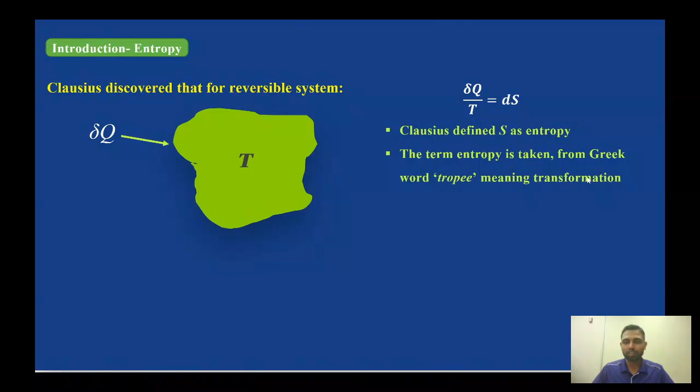So we used a concept called entropy and entropy generation. This is a very old concept. People think it's very difficult, but it's actually the simplest concept available. Clausius discovered that for a reversible system - meaning you start from the same state and end up in the same state - when you give heat to the system, the temperature increases. He defined the ratio of heat by temperature as the change in dS, and he defined S as entropy. In Greek, tropee means transformation. So this is the basic idea of entropy.

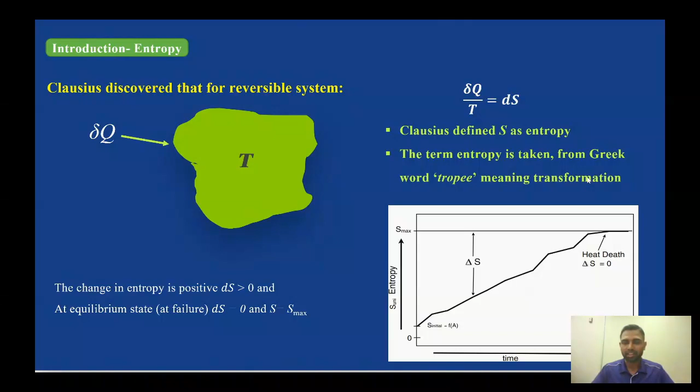Now coming to entropy generation - any degradation process, like any failure system going through failure, is irreversible. A reversible system doesn't have any damage, but an irreversible system will have damage. That damage increases your disorder, which is your entropy. So this entropy generated is called entropy generation, and entropy generation is a universal mechanism.

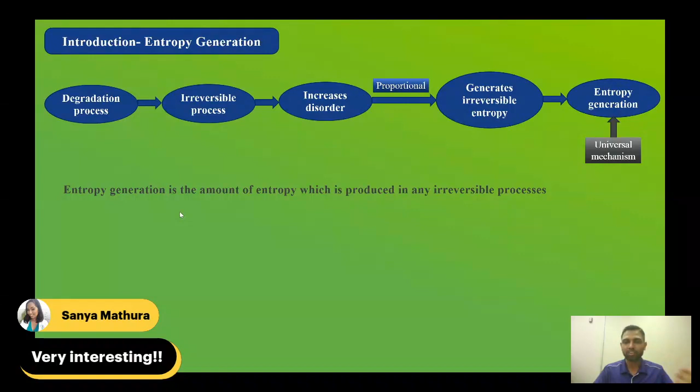So we will be using entropy generation as the topic for evaluating grease performance. Entropy generation is the amount of entropy produced in an irreversible process. During a reversible process, entropy generation is 0, but in an irreversible process there is damage - for example, wear, friction, everywhere we have entropy generation. So entropy generation can be the potential mechanism to measure the permanent degradation of any system.

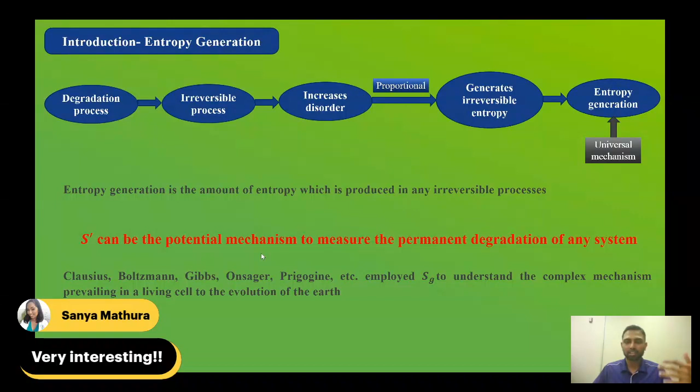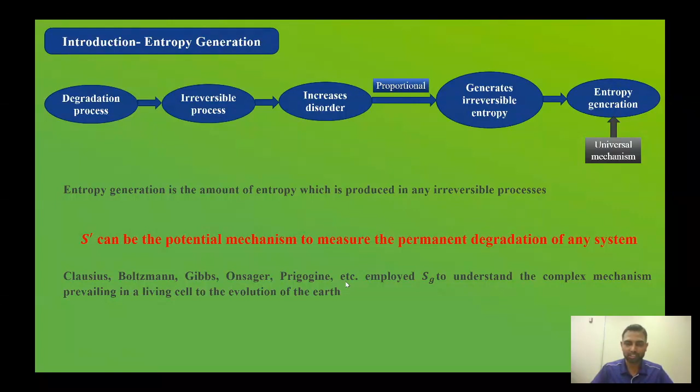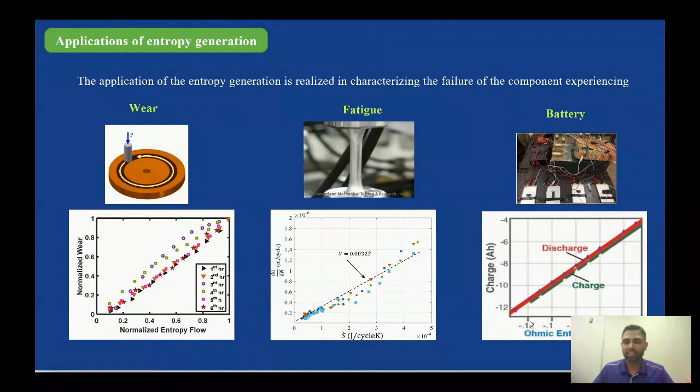So prominent Nobel Prize winners like Clausius, Boltzmann, Gibbs, Onsager, Prigogine, etc. have used entropy generation to study complex systems, from the evolution of Earth to biological systems. Our present group has been employing this entropy generation mechanism for studying wear, fatigue, and battery degradation. For example, wear is the degradation parameter and entropy flow is measured - it's linear. Similarly, entropy generation and crack growth in fatigue is linear, and in batteries, the entropy of the battery and the charge are found to be linear.

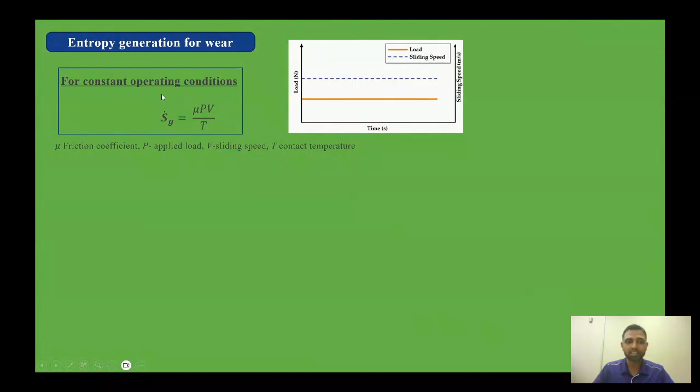So entropy of wear is calculated by friction coefficient, applied load, velocity, divided by temperature. This is a simple equation - you can see that applying this equation is very simple. This equation is applicable for a uniform applied load, but our real system is non-uniform, it's variable, so this equation becomes adapted with real-time values.

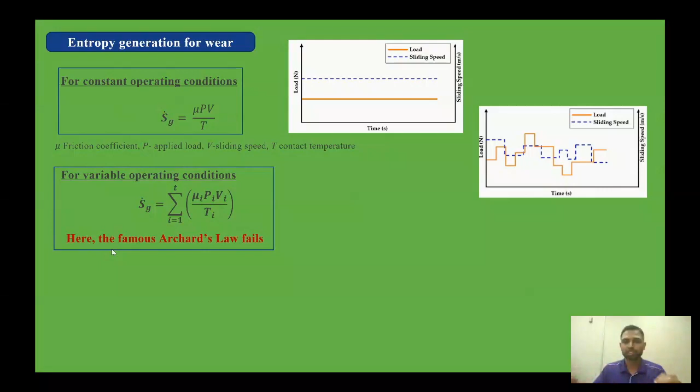And importantly, the famous Archard equation law fails when you apply it for variable load conditions. For example, when you load a system from high to low, it will behave differently than when you load it from low to high. So those systems are characterized by entropy generation.

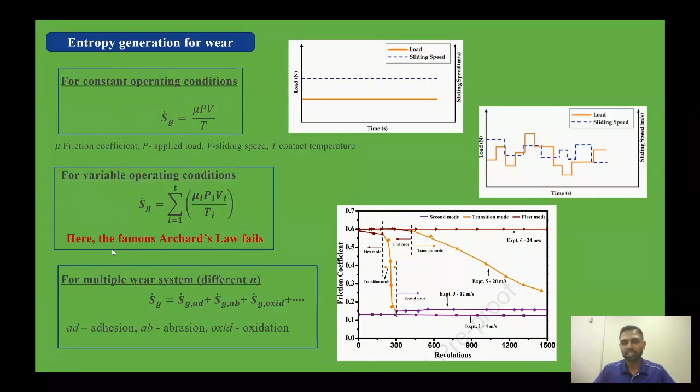And finally, if you have different mechanisms - for example, adhesive wear, abrasive wear, any kind of system - you have different entropy generation. So these can be characterized into different mechanisms.

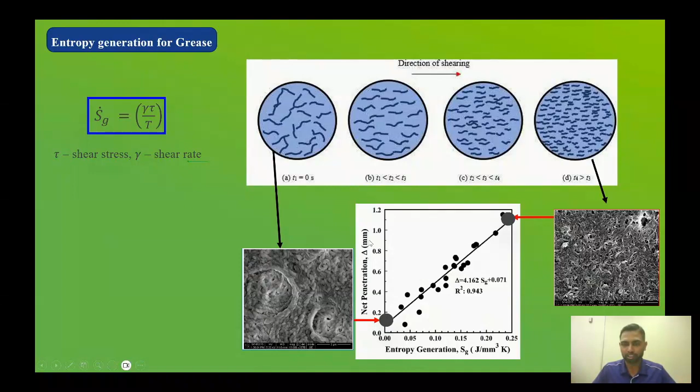Now we are extending this entropy generation concept to grease. We know that grease goes through degradation as we work on it - it can be mechanical, oxidation, thermal, or contamination. So at every state it goes through degradation, and we found that the entropy generation is nothing but shear stress into shear rate divided by the temperature. This is linearly proportional. So we finally say that using entropy generation, we can characterize the grease degradation happening with time.

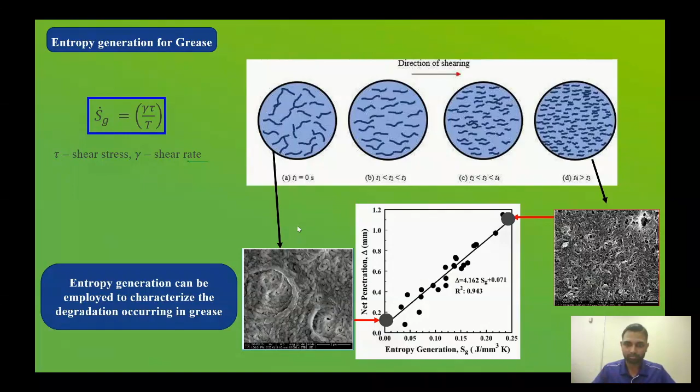So for real-time measurement in an application, if you want to measure the shear stress and shear rate, we used to have a torque sensor. Even the primitive ones like the rheometer also have a torque sensor. So we use a torque sensor to measure the shear entropy generation. But the problem is that to install a torque sensor, you have to cut the shaft between the motor and the working medium, which is not possible in an existing system.

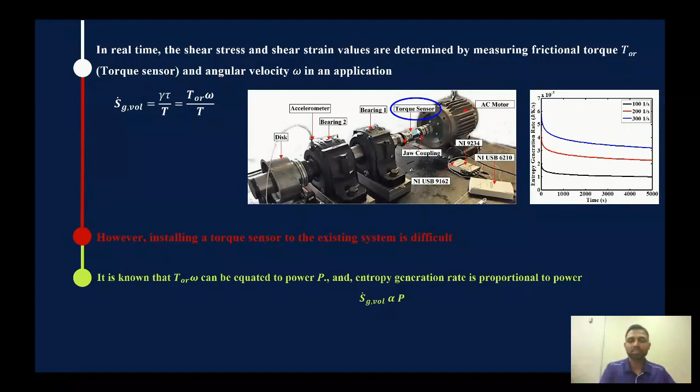So for that, we came up with an indirect way, by measuring entropy generation and power, since power and entropy generation are correlated, because motor torque can be connected to the voltage and current. As you load the motor more, the current is going to increase, same as the torque. So this is an indirect way of measuring the entropy generation or the torque. We use voltage and current of the motor to measure the power, and we correlate the entropy generation.

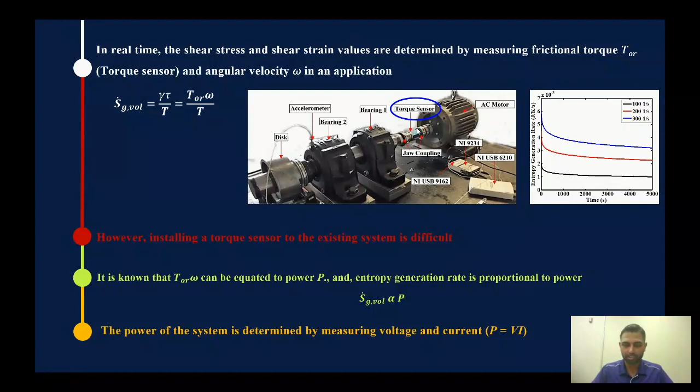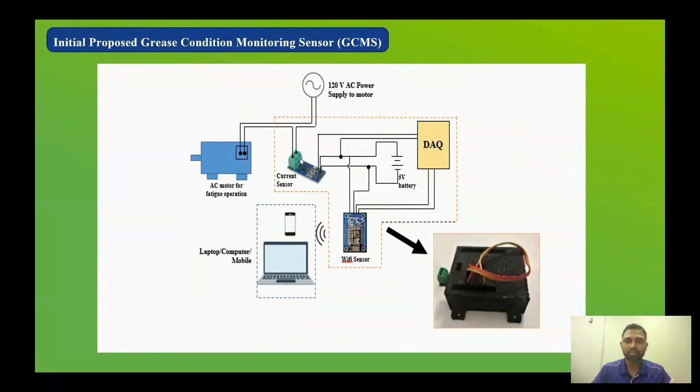So now, after developing the concept, we developed an instrument in our lab to measure the current of a motor. We have a motor, a current sensor, and then a DAQ. Then we used an Arduino board to measure the real-time current value. Based on that, we tried to measure the entropy generation. To implement the concept, we modified a viscometer and connected its power to the developed prototype, and the sensor gives the signal to the laptop or mobile phone.

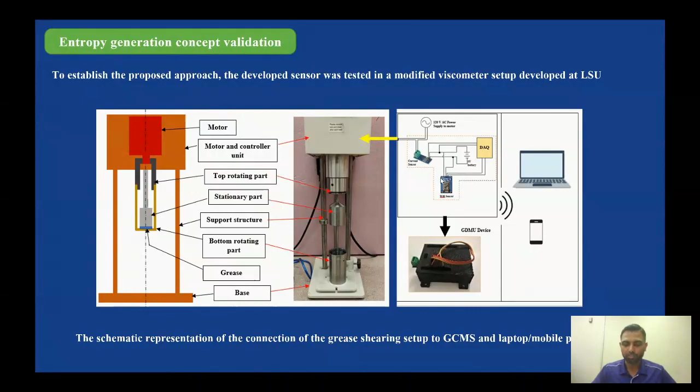So this is the result we got from the sensor. Initial current region 1 is the idle condition. Region 2 is initially non-uniform, because you can see on the left and bottom side, when we apply the grease, it's non-uniform, random, and as you go with time, it becomes a steady state, a uniform mixture, which can be seen in the second picture. So that's region 4.

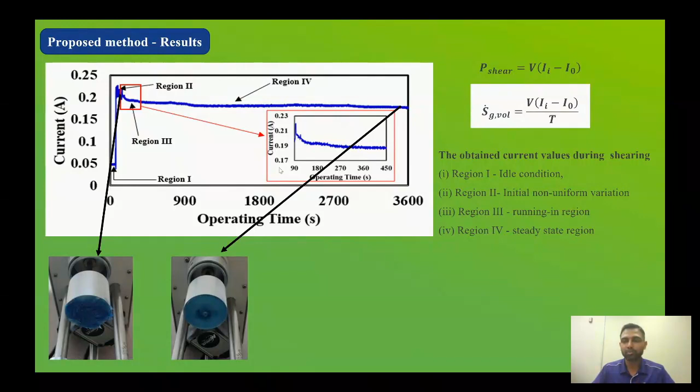So the entropy generation is nothing but voltage times the prevailing current minus initial current. Region 1 has some initial current, we have to subtract it. That's the entropy generated to damage the grease. The point is we have to find how much entropy generation has been put onto the grease to damage it. So when you subtract the initial current from the final current, you get the change in current times the voltage, which remains constant, and the prevailing temperature.

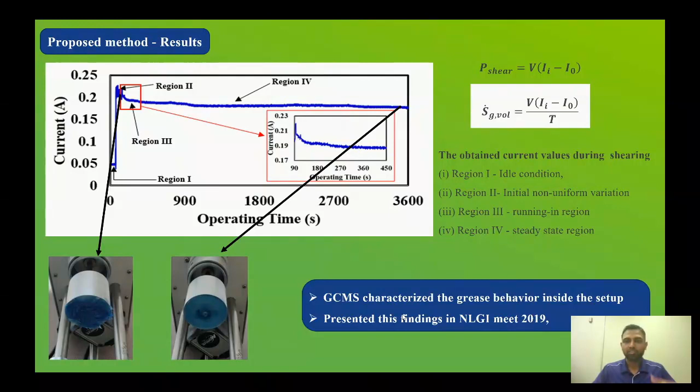So GCMS, that is grease condition monitoring sensor, characterizes grease behavior inside the system. We presented this topic at NLGI meet 2019. That's where we came into contact with a person from a company, and he wanted to test this sensor for his grease kettles. So now we shifted this topic to the grease kettle monitoring sensor, adapting this grease entropy generation for monitoring what's happening in the grease kettle.

Grease kettles are used for manufacturing different grades of grease. To know the consistency of the grease, samples are collected by interrupting the grease kettle. After the grease manufacturing is done, they collect the sample, cool it in water, work it for 60 strokes, and then bring it to 25 degrees centigrade. Then they do the consistency test. If the consistency is higher, they add oil to the grease and mix it. This goes on until you reach the desired grade.

But if the penetration is higher, the grease has to be discarded. So you need a grease monitoring sensor to see what's happening inside. A wrong measurement of penetration may result in discarding the batch. One more thing is the QC check limitation. The QC check doesn't happen immediately.

Presently the testing is done by the process engineer who takes the sample, does it immediately and decides. For the QC check, for example, if some grade of grease is going on, they will wait for the other grade or type of grease until that process is finished. So there is a wait time for a test to happen in QC. The quality check has to be done in the lab, so this takes time.

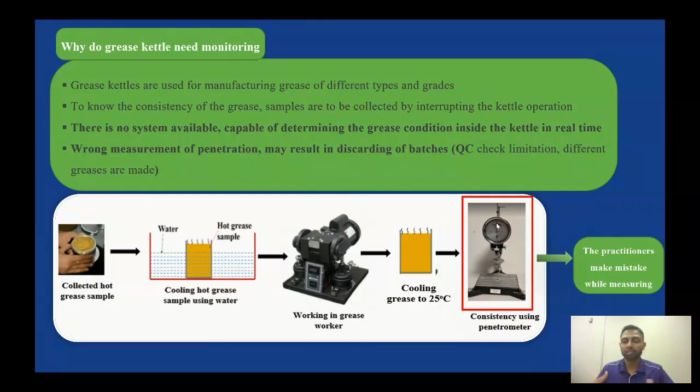So for the initial stage, the kettle manufacturer sent us the lab size kettle for testing our prototype which we developed at LSU. So he loaned us the 5-gallon capacity grease kettle manufacturing process, and we connected the current sensor to it, to the control panel, and we used a Raspberry Pi and Python to program it and to evaluate the system behavior.

Since at LSU we are not able to manufacture the grease because of the hood problem and higher temperature, smoke release, we tried with the existing manufactured grease. So as the temperature was increasing, the consistency of the grease reduced, which is monitored through the agitator current. So we connected the current sensor to the agitator motor, and the motor current was reducing as the temperature was increasing, and the consistency was reducing.

So we can say that the consistency is increasing or reducing just by monitoring the current value. And also we found that the penetration and the agitator current had a linear relation. This penetration is done by ASTM standard using a penetrometer. So those values and the agitator current values are approximately linearly proportional.

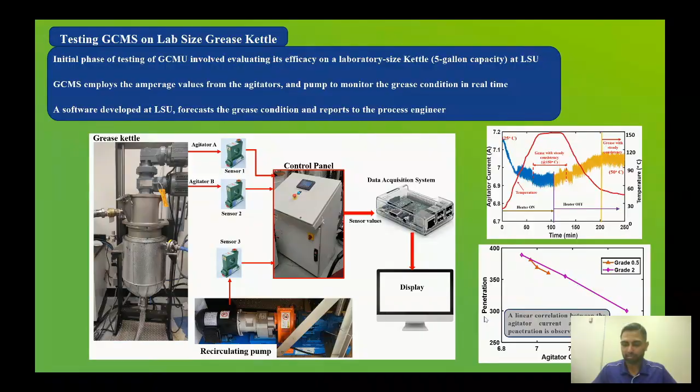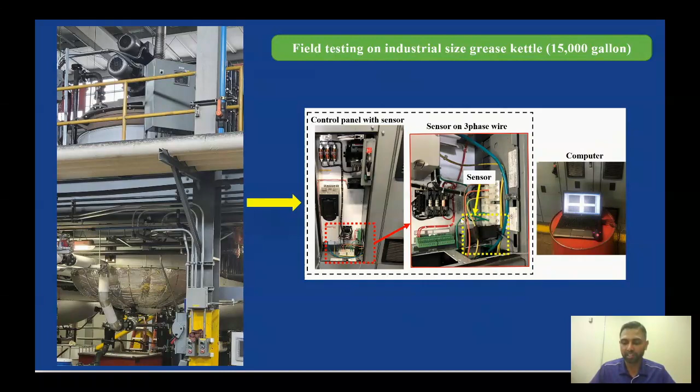So now we did the 5-gallon test. We had to test it for an industrial application, so we did a field testing on a 15,000 gallon grease kettle. You can see on the left hand side, this is a grease kettle, and we didn't interrupt any of the system. We hung the split type current sensor into their control panel, and we monitored how the current is behaving. So this is the process which is involved inside the grease kettle.

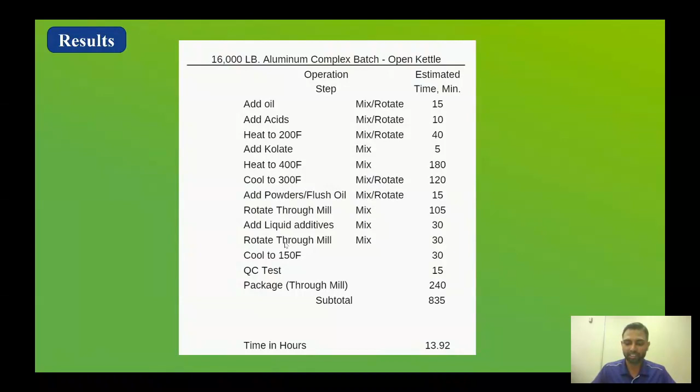They add oil, they add acids, they heat it to 200 Fahrenheit, they add Kolate, then they heat it to 400 Fahrenheit, cool it, then mill it, additive, etc. So they have different processes involved during the manufacturing of a grease. So I have separated it into 7 different regions: acid plus base, Kolate, heating to 400 Fahrenheit, 300 Fahrenheit, etc.

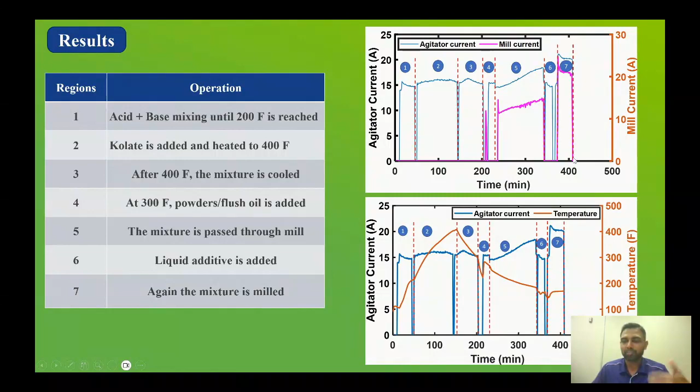And in the other case, if it goes to the lower grade, our sensor will give a warning signal that you are going towards a lower limit, you have to stop the operation, or take corrective action. So this sensor will give information to the user through mobile phone or through your system that something is going on, take the corrective action.

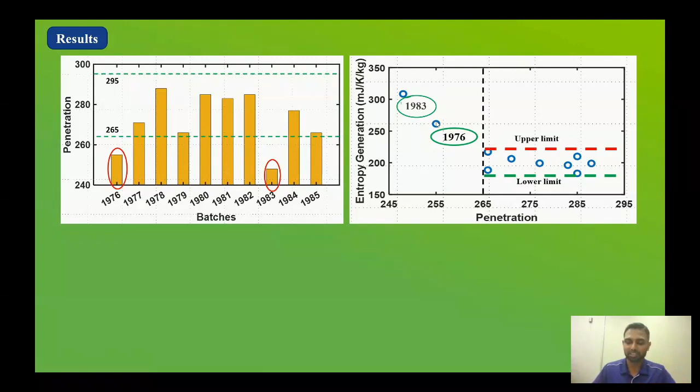So what we found is that during these two batches, they added the kolate very fast, so the reaction happened faster and it ended up in higher grade grease. These things we were able to find out using the entropy generation value. So in conclusion, entropy generation helps in understanding the process happening inside the kettle.

So it's a commercial scale process. Amperage and temperature data can be used to calculate the entropy, and based on that, you can correlate the penetration value. So earlier process warning provides time for batch investigation and process adjustment, which will minimize process rejection. So this is the advantage of entropy generation.

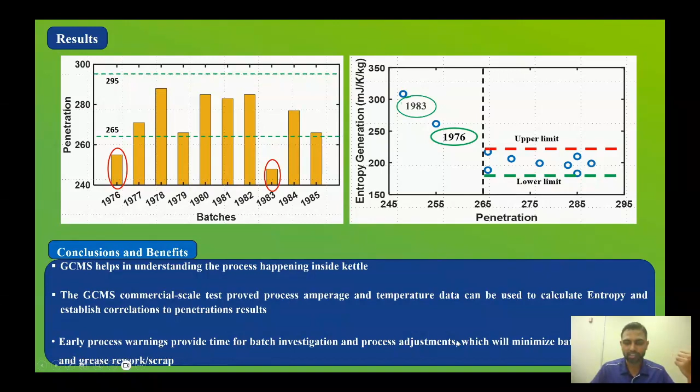So next, I'm going to talk about my second sensor we developed at LSU. So this is like a contact angle setup. So we tried to develop a portable contact angle instrument. So the existing standards available, they say how it adheres. For example, the spray off test says how well the grease is attached to the bearing, but doesn't say that it is water repellent or water absorbent.

And these tests have to be done with water at like 77 degrees centigrade, so that some of the lubricant, like grease property, gets evaporated during that course, and they are not capable of assessing water repellent or absorbent, and require a large quantity of grease.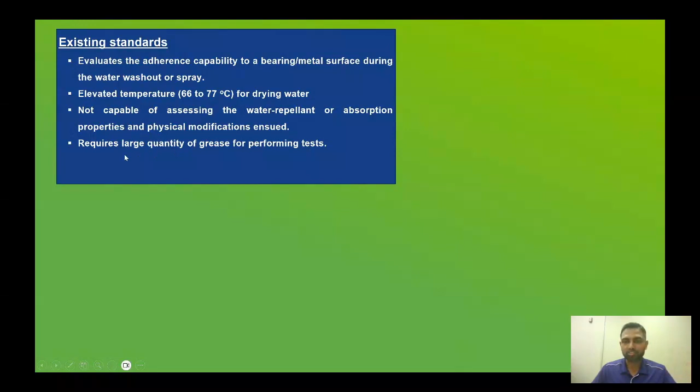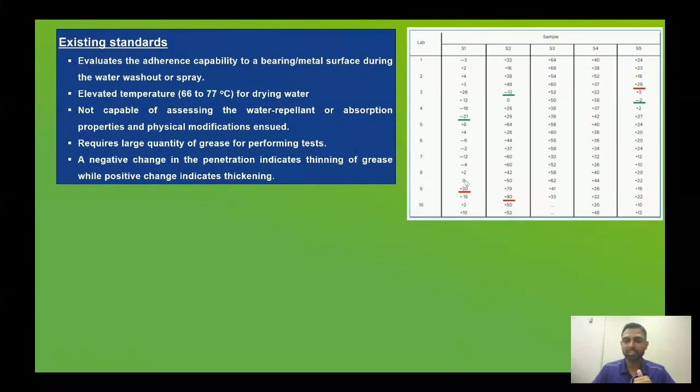And another thing is that when the penetration test was done on different greases at different locations to establish the ASTM standard, several places had a positive penetration change. That is, when you add water to the grease, the penetration value, like the consistency, increased, and some places the consistency decreased. You can see that for two different greases, the consistency has increased and they have become thick, and in the other case it became thin, like it becomes fluid.

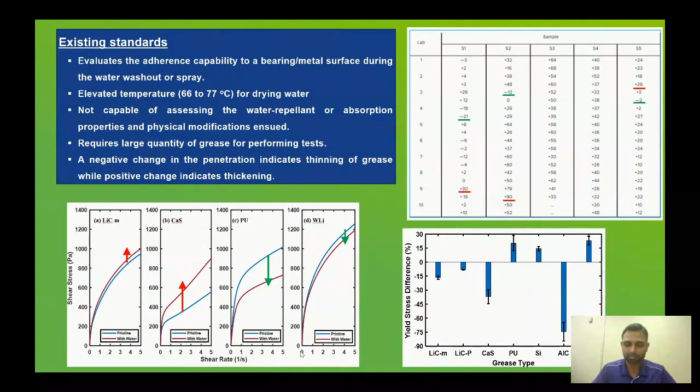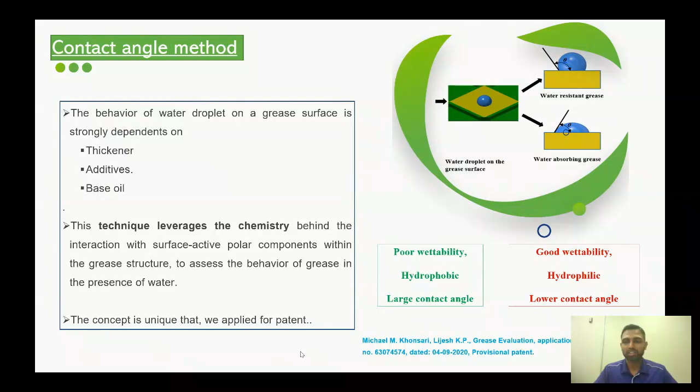So when you measure the consistency change in a grease sample with addition of water, you can't put it on a single platform, because one is positive and the other is negative. So then we came up with a contact angle method. When we were working on coatings, we had to evaluate the coating performance by measuring a water droplet on the surface. So based on that, we developed the contact angle performance method. So this depends not on the physical, but on the chemical measurement.

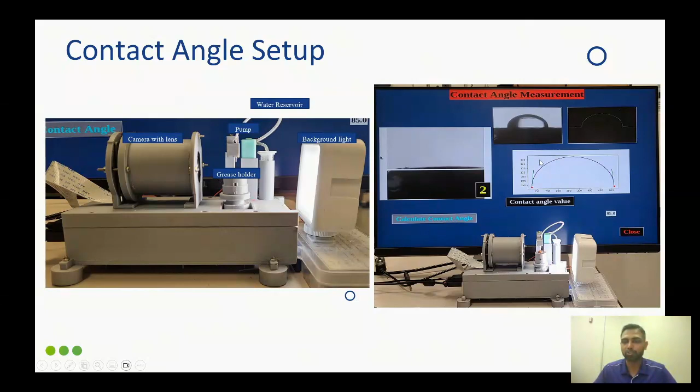So initially we started with the Krüss contact angle measurement system, but it's not portable. So we had to go through three different stages. So the last one is the final stage. So we have a grease holder, we have a pump. The pump is for the uniform measurement of the water droplet. So you can see that this is the final output. So we developed a GUI in the lab. So everything was done at LSU.

So this is how the process is done. You put a grease sample, and then we have a GUI. We start recording, and then the water droplet comes in. You can see the water droplet on the grease surface, and then you have to wait for like 60 seconds, and then you wait for a few minutes, and the results come in. So a good grease, with a good water resistant property, will have a higher contact angle, while a degraded grease will have a lower contact angle.

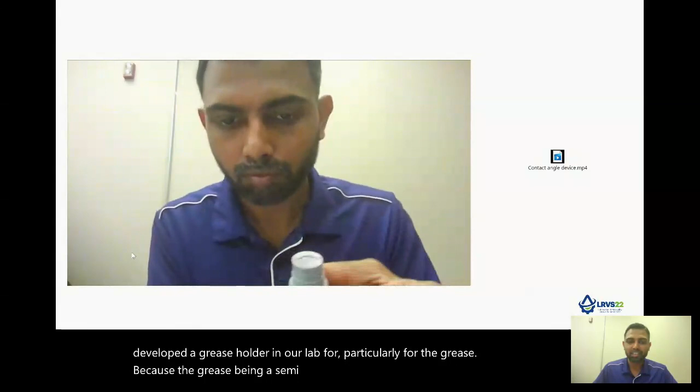And this is how we prepare the sample. We have developed a grease holder in our lab, particularly for the grease, because grease is a semi-solid, unlike solid coatings, so we had to come up with this grease holder. So we fill the grease in a slot, and then we wipe the grease off, and then we move the grease holder downwards so that you can see the projection of the grease. So we use this grease for the testing.

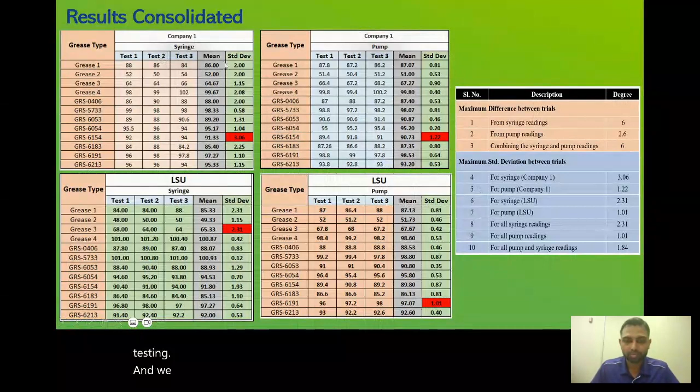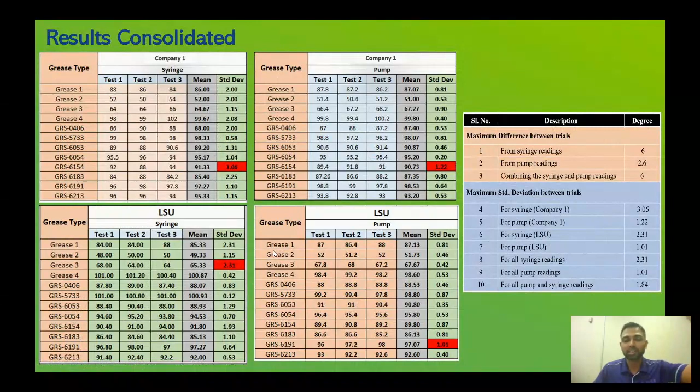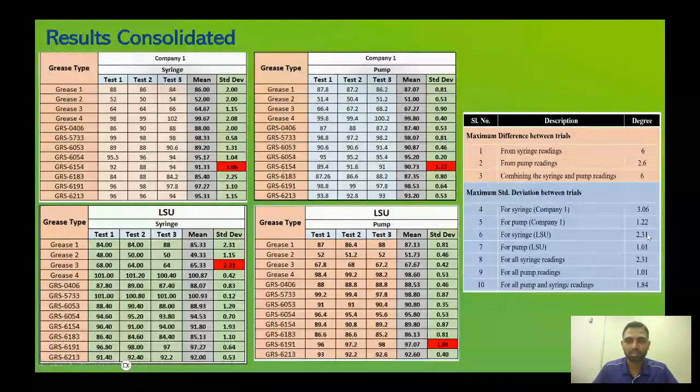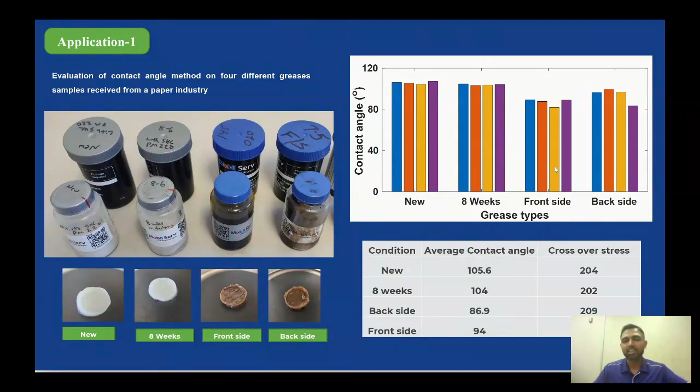Like for the new, its contact angle is high, and on the front end side it is lower. So it can say that the grease on the front end side has degraded. So this decision can be made by the practitioner by taking the prototype to the industry directly there, rather than going to the QC lab to check while the industry has to wait for it.

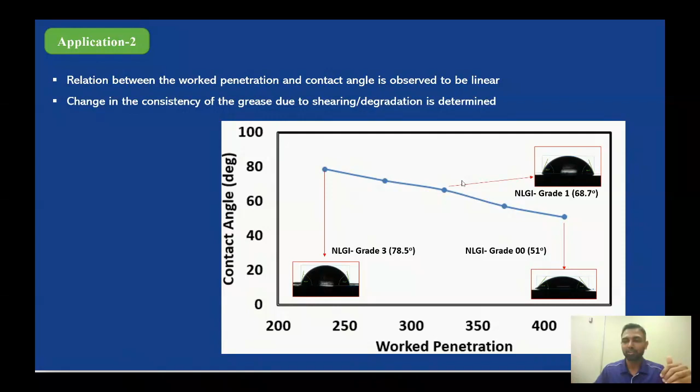And second one is that the consistency of the grease also found linear, because as you add the oil, the water property will change. So thickener is more, oil is less, the water droplet will be higher. And similarly, the more the oil, the water droplet will go down. So this can also be implemented for measuring the consistency.

And third one, this is like a grease. A fellow mate got it from a bearing which was running for 10 years in a naval plant. So they had a grease sample. You can see that it has 2 colors. One is like whitish and a brownish. So when I use both mixed, I get a contact angle of 74.

Then I tried to segregate the white one and the brown one. So when I segregate it, the contact angle seems to be different. For example, the whitish one seems to have contained more water in it, and it showed a lower contact angle, while the darker one showed a higher contact angle.

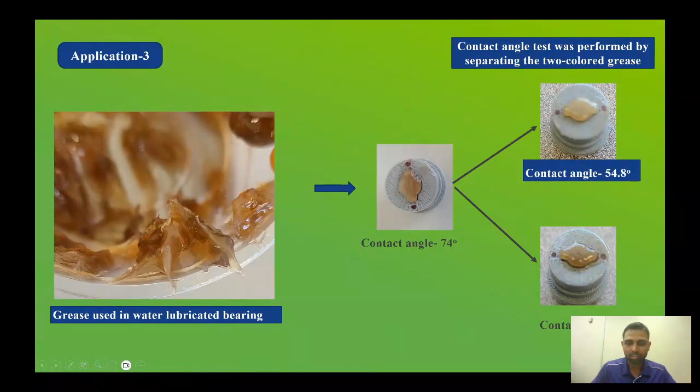So in the conclusions, this can assess the degradation of grease. So, contact angle approach. Our objective was to make it a portable unit, and the procedure is simple, doesn't need expertise. You only need preparation of the sample by wiping off the grease. The result can be generated in 1 minute, and the customer can plan their maintenance.

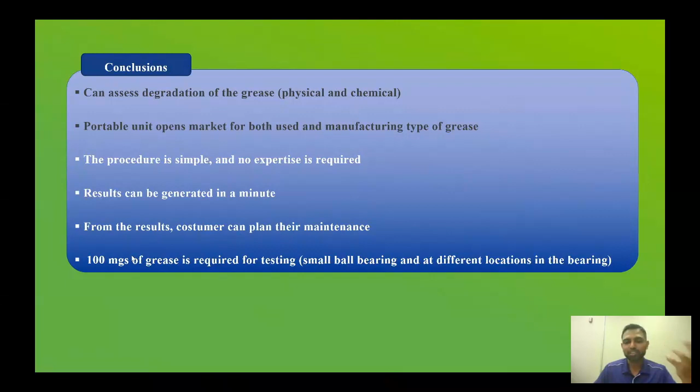So the advantage is that it's portable. You can take it to any plant and do it, because it involves a Raspberry Pi, which can be operated on a power bank, and only 100 milligrams of grease is required for testing. The present test methods can't test a small ball bearing. However, using this approach, we are able to test the grease samples from small ball bearings, as well as take samples from different slots and test them.

So this is also applicable for the entropy generation method, where, as I said, entropy generation has classified different entropy: one due to oxidation, one due to mechanical, one due to thermal. That's the strength of entropy generation. Generally, what we do is take a cumulative degradation, but it's the wrong approach, because every degradation happens its own way. So we have to separate it, and this separation will lead you to a different understanding.

For example, a grease, when you rotate it at a higher temperature, will degrade through the temperature. It will degrade by the mechanical shearing, and it will degrade by both mechanisms. So that's how the entropy generation method is adaptable and helpful.

Lijesh, we have time maybe for just one quick question. Do you recommend any specific brand reference for the portable device? So actually, we have a patented technology, because the existing portable devices are not used for grease; they are for coatings. There you have a solid surface, so you just drop a water droplet on it. But grease is a semi-solid, so you can't spread it and put it, because it will have non-uniform results.